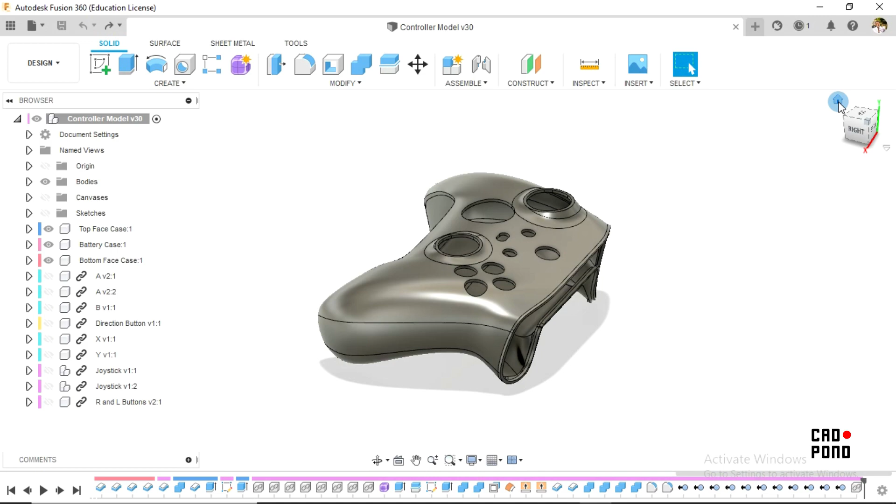In this video, we're going to proceed with our Xbox Series X controller pad, and our assignment is going to be to create our buttons located in these spaces and also the Xbox logo located here. It's going to be really simple, and we're going to be using tools that are quite easy to understand, which are to offset faces, to cut faces, cut bodies, and just that.

Alright, so let's get right into it.

Okay, so the first thing we're going to do is go over to this spot and make all of these bodies or components invisible. Our bodies are visible, so we just go back to this shape. Hopefully you still have this in your feature tree and haven't deleted it yet. However, if you don't have it, it's going to be a different procedure for you. So I suppose that you still have this, and hopefully you do.

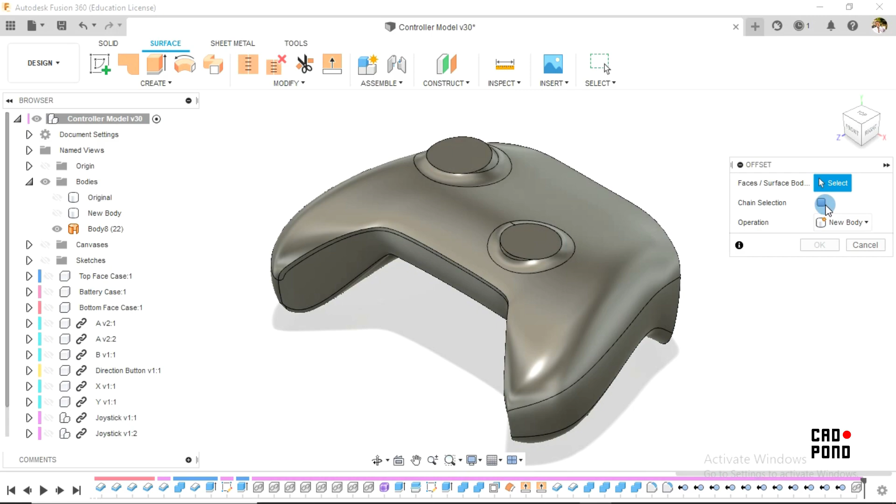To go on, we go over to surface, and we're going to be creating an offset of this surface here. Make sure that chain selection is unselected or deactivated, and then I'll select this top face. In your case, if you don't have this surface anymore and you've deleted it, what you're going to have to do is go to the top face and click on it as your own reference face.

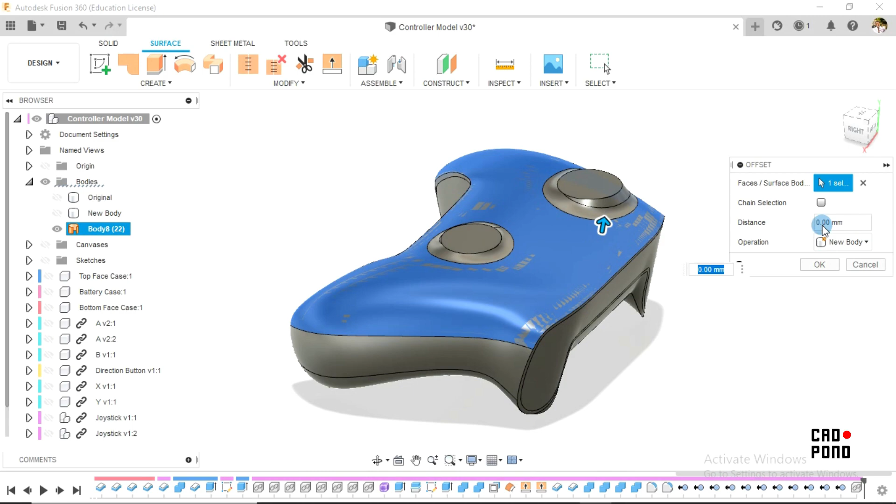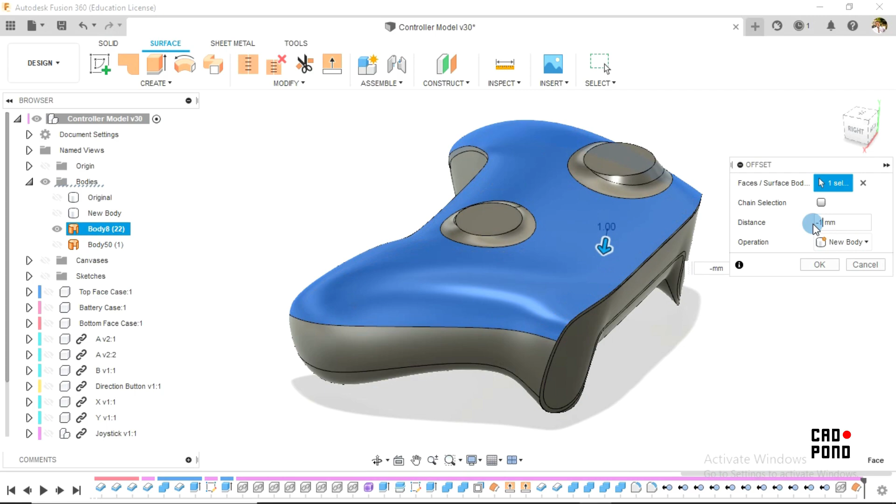But in this case we're doing this, and our first distance is going to be 0.25 millimeters, going in the upward direction, and I say okay. I'll make that invisible for now and repeat the same process. Offset again, I'll select this and make it go in the opposite direction, which is minus 1.5. Alright, so with that we say okay, and I'll make this entire stuff invisible.

So what we have here now is these two surfaces. Like I said, in case you do not have this and you have to use the top face, then you're going to come across a challenge that you have a circle here which needs to be closed up.

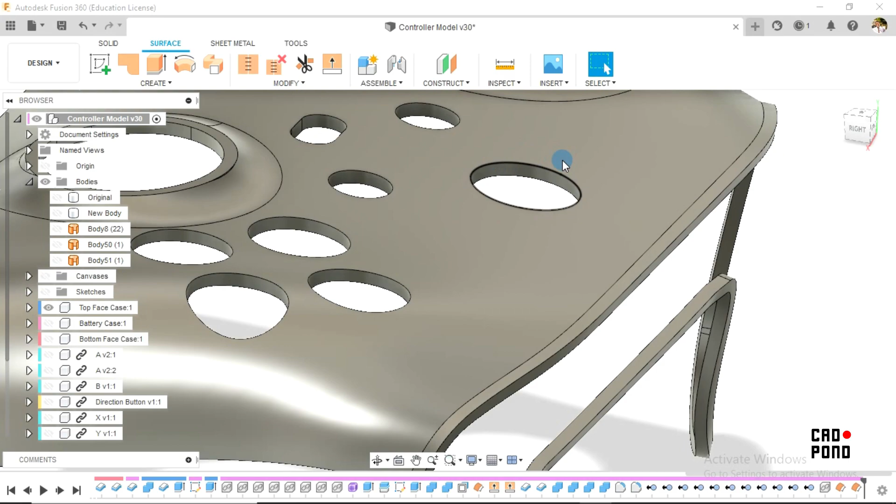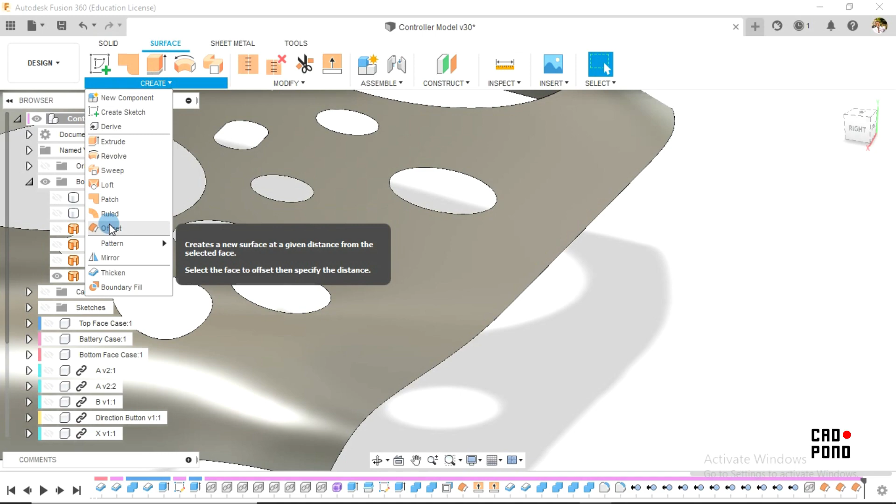In that case, what you're going to have to do, I'll just show it real quick, is to create your offset. Let's assume we're creating the offset at this distance. Alright, and I'll make this invisible. So how you're going to fix that - you do not have to bother with the rest of the openings that we have. You go over to create and patch. So with the patch tool, we just select the boundary edges and say okay. That solves the problem.

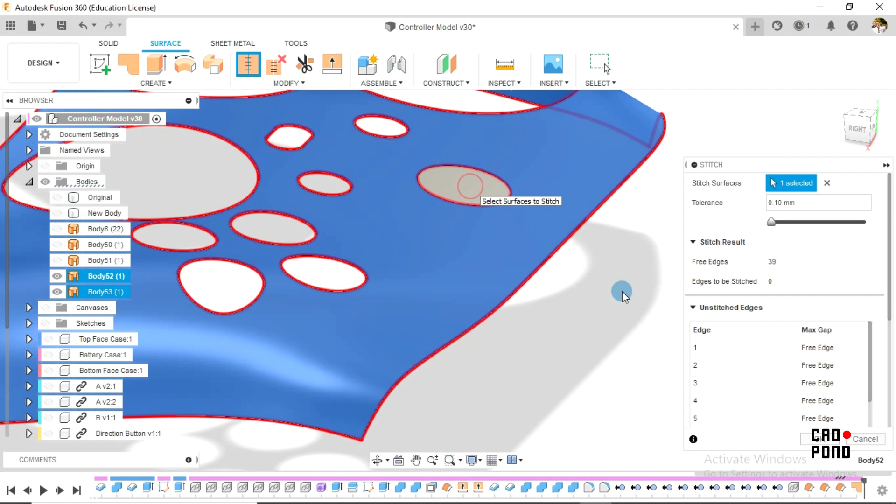However, this is not our process, and when you're done with this, you can also just stitch it together, one and the second face too. Alright, so with that, okay, and then you pretty much have what we need to proceed. You do not need to bother about the rest of the parts. All you need is just this part here. However, we are not going to be using this, so I'm going to get rid of all these.

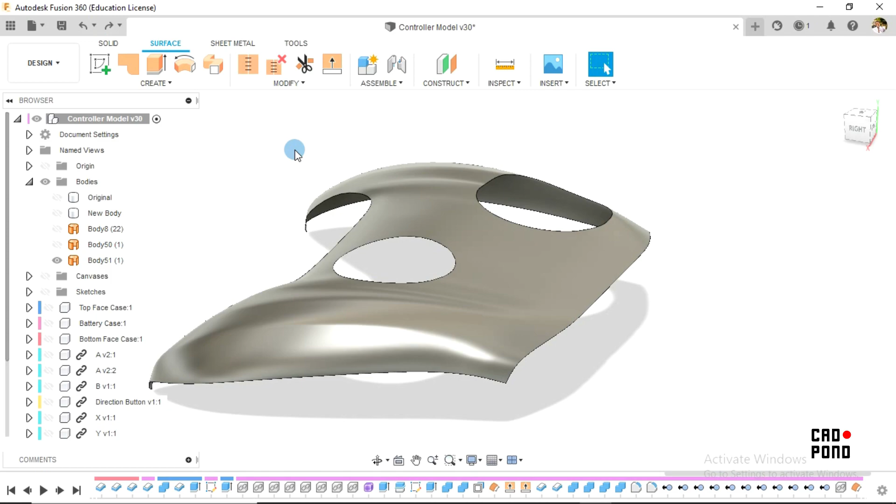Alright, so we have these two here, and then the next thing for us to do, we go over to our sketches, make it visible, and then we look for the top sketch where we created all of these features.

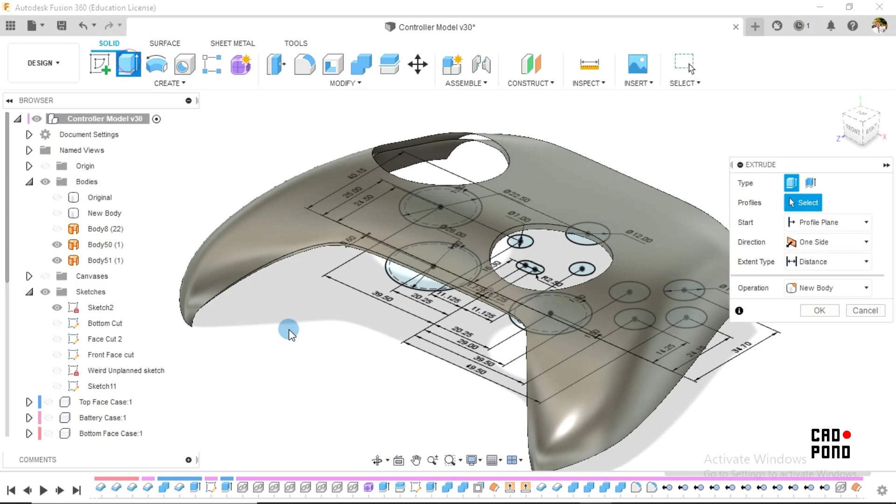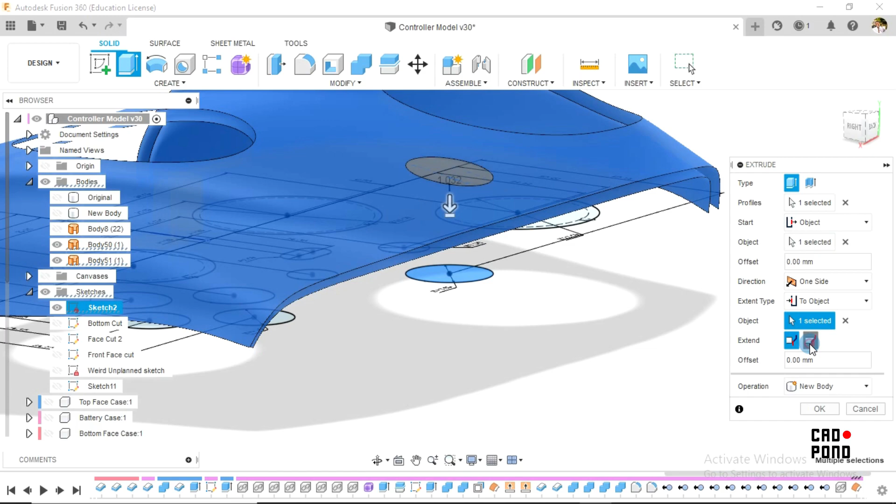Very easy. I go over to solid and click on extrude, and what I'm going to be extruding is this body here. I click on that and choose my start plane to be object, which is this object, and choose my end type to be to object again, which is this object. And I'll choose this and say new body, fine, and okay.

Alright, so we notice that there's an extrusion located in between the both of them, and it uses those two surfaces as the extreme extents, which is what we want to have. So I can make this invisible and we have this.

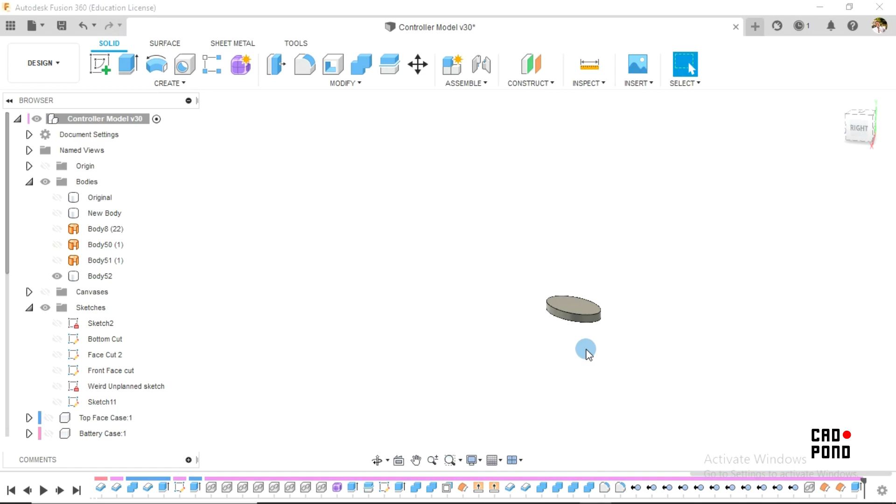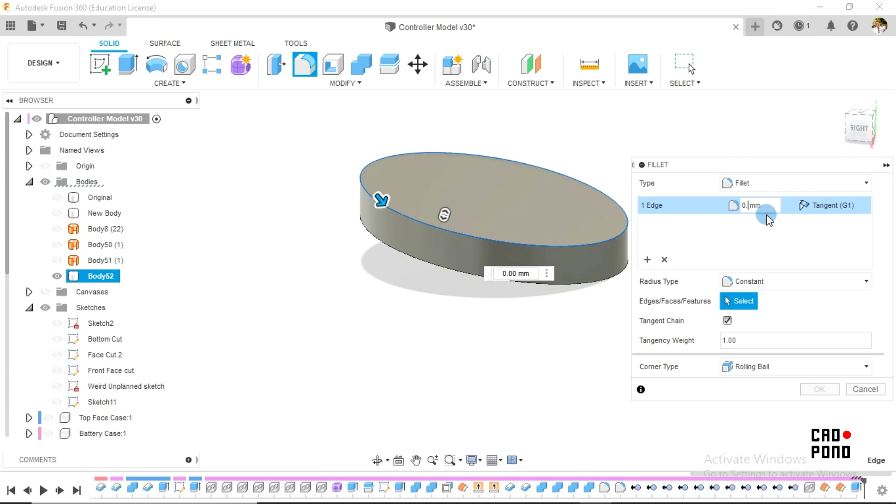Our next procedure is easily going to be to create our fillet. So we understand that this is not supposed to be sharp - it defeats the purpose of ergonomics when it comes to product design. So it has to be something that is quite safe for users to use. Sharp edges like this are not allowed. Hence, we create a fillet, and we don't make it a lot. So I guess we just make it 0.3 millimeters and say okay.

Alright, so if we make the top face visible now, we notice that this is what we have, and it's flushing with the bottom face here. I'll make it invisible again because I really don't need it.

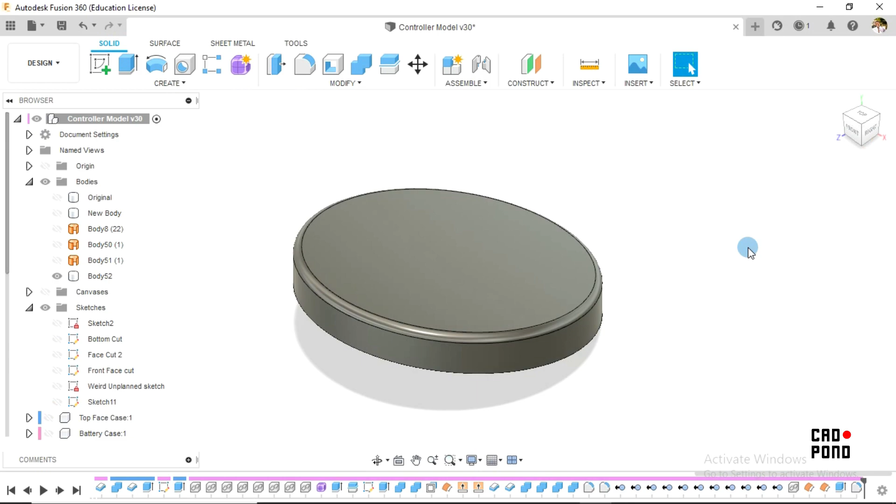Now our next thing to do will be to create a new sketch. So using the sketch, on the top plane, we have it this way. I move and position properly. I go back to canvas, and I make the top canvas visible.

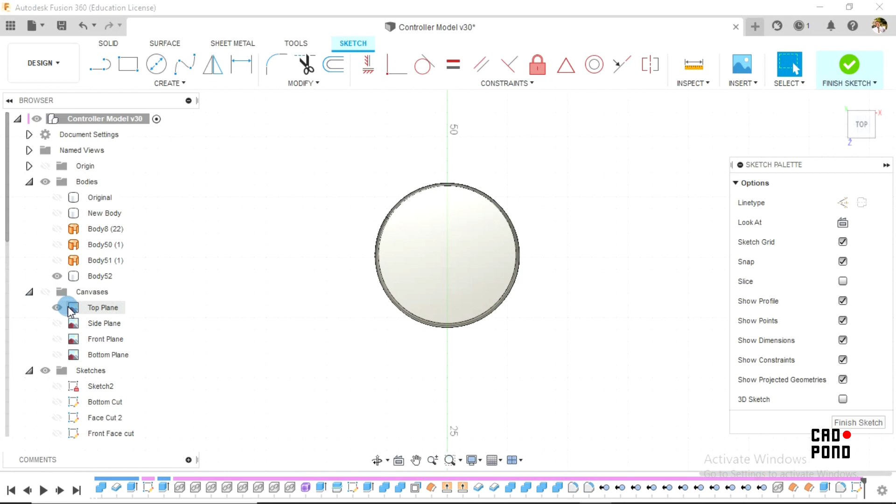So what we're going to do right now is just to trace out the shape of the Xbox logo. And to do that, we're going to make use of our spline tool, the control point spline.

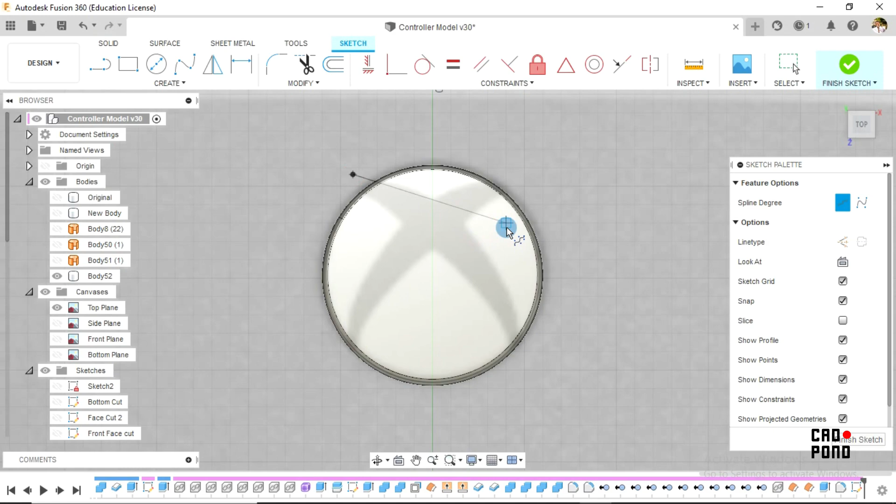I select my first point. Take note that it doesn't have to be accurate. I select my first point and my second, click on the check mark, click on enter, and drag this point here.

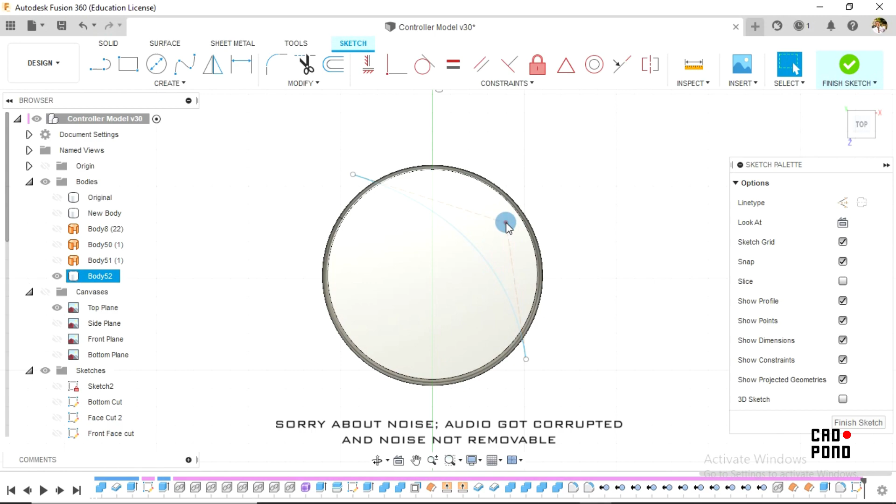I'll make this canvas invisible, and also the body, so it doesn't confuse me. So I click on this and I'm able to drag to position it properly to the shape that I desire. Once you've gotten your desired shape, the next thing is to repeat the same process.

Create spline, control point spline. I select my first point, my second, and my third. I'm using the control point spline because I think it's easier to control, definitely. And I'll say enter again.

In other cases, if you use the other spline, which is the fit point spline, it's kind of difficult. Well, probably not for everybody, I don't know. But for me, I prefer this control point spline.

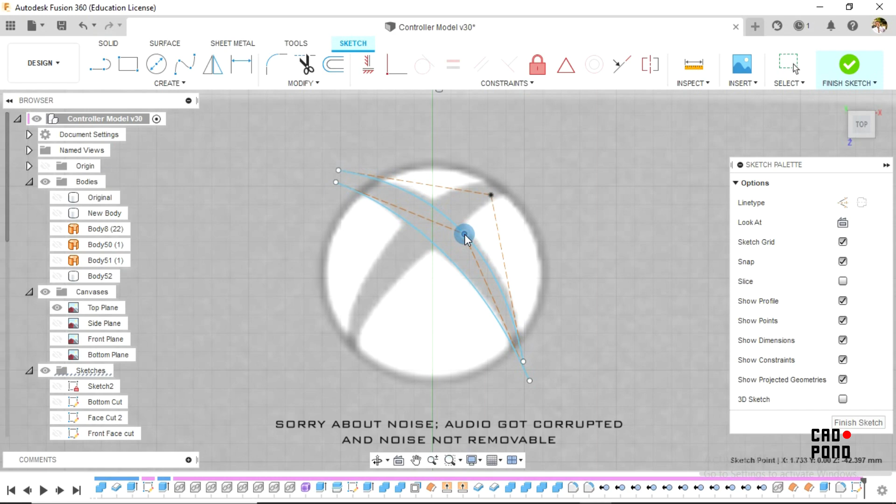Now that we have done this and we're satisfied with the way our logo looks, the first part of the X shape, we're going to easily create a construction line for the purpose of mirroring. I'll draw this way.

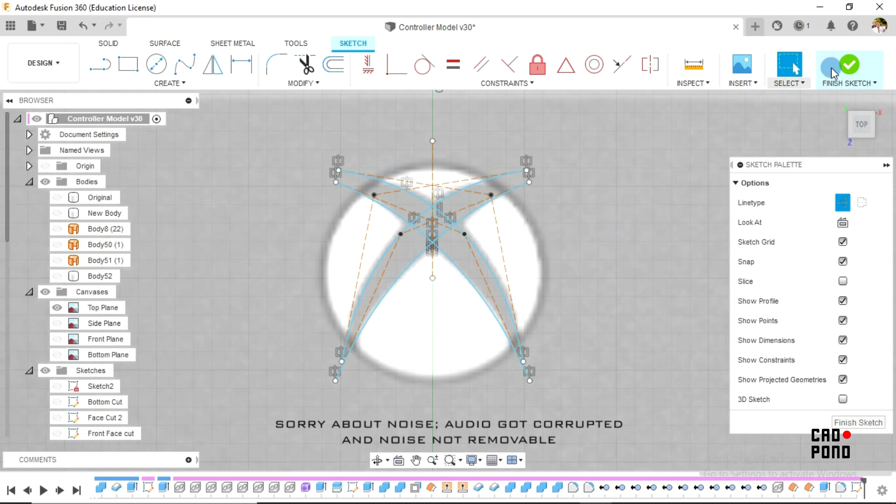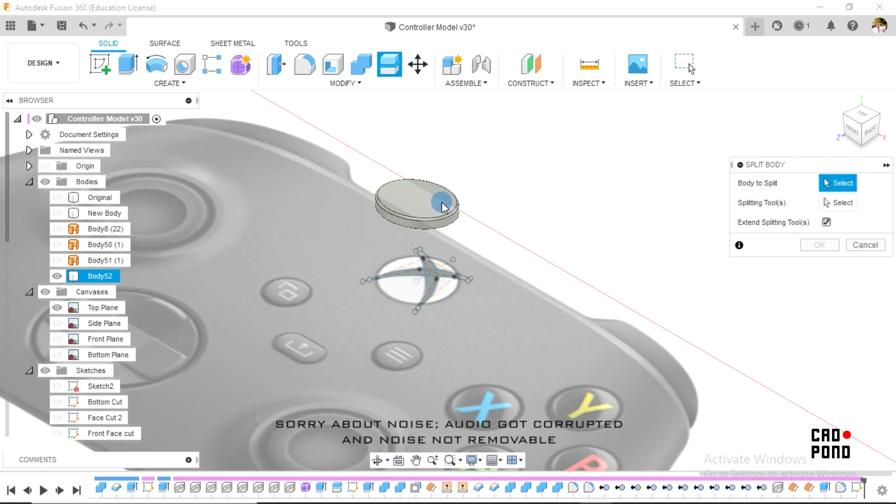Now we're going to go over to modify and choose split body. The body to split is this body, and our splitting tool is going to be the sketches we created. However, for some reason, we cannot select all of the sketches at the same time, so I suppose we can only select sketches that do not cross each other.

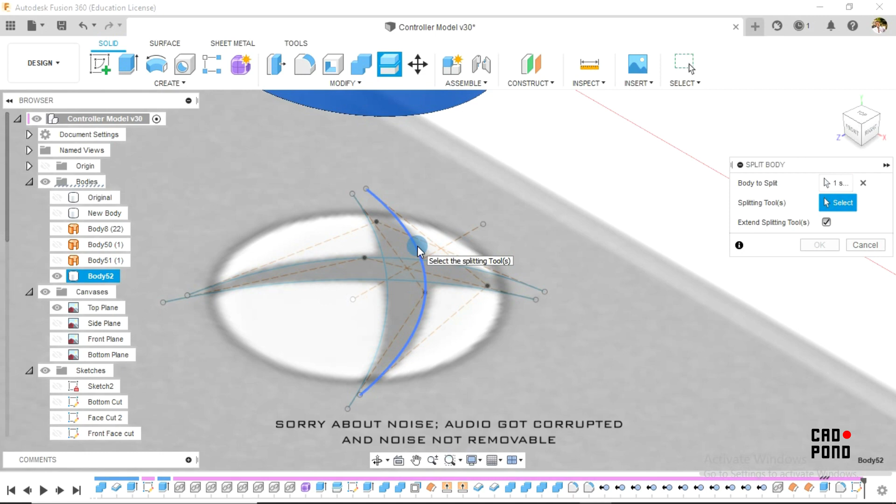I'll select on first splitting tool, select on this and this. We're not able to select this because I guess it crossed these sketches. And we use the extend splitting tool so that it cuts it completely, and we say okay.

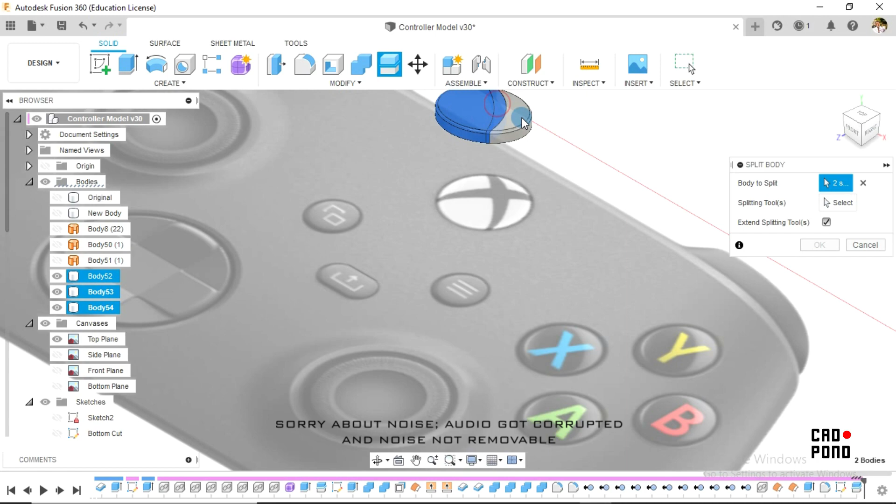Now that we have this, we repeat the same process, modify and split body. Take note that we have 3 bodies now, so we have to select every one of them. And then we make our sketches visible again.

Oh, not you. You. And then we choose these sketches now. Alright. Okay.

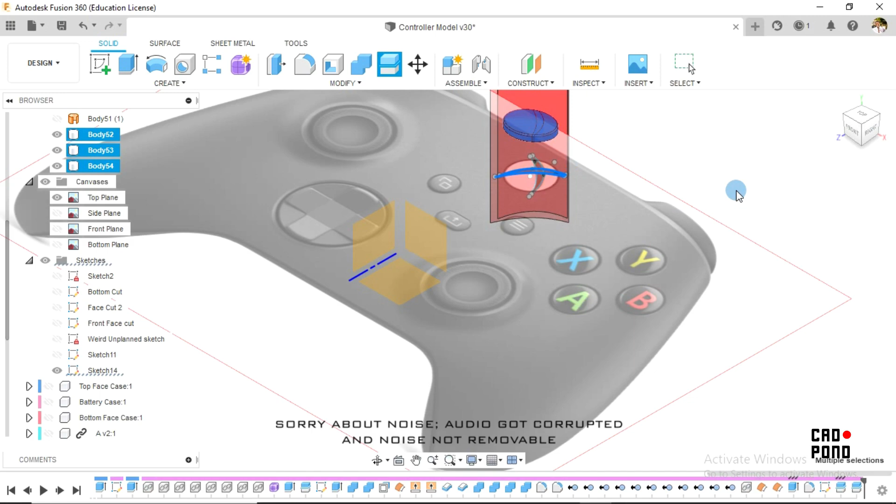Now with this, we have our Xbox logo done, and all we need to do is to combine some of these bodies together. Alright, so we go over to combine.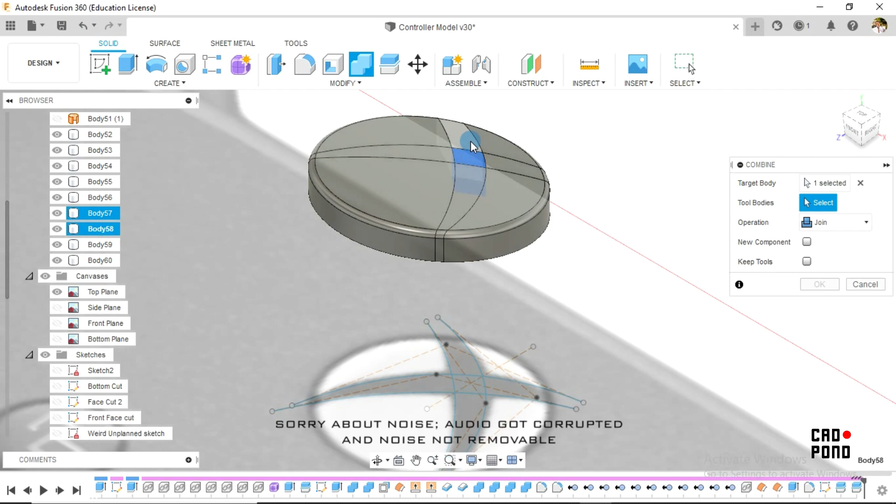Our target body is going to be the center body, and our tool bodies are going to be the other bodies created. So we choose new component and OK.

Alright, so we still have the bodies separated, and it seems, yeah. So we just remove the one at the center. Okay.

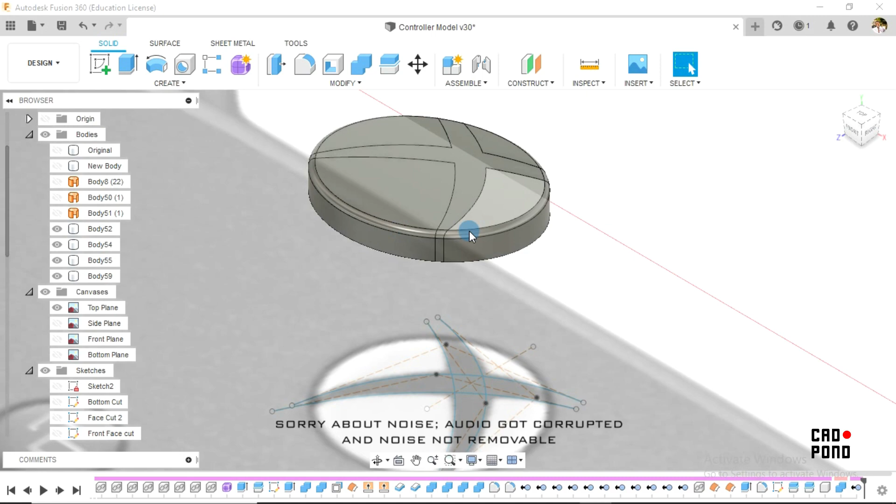Alright, so this is done, and then our next step is going to be to create the other buttons 1, 2, 3.

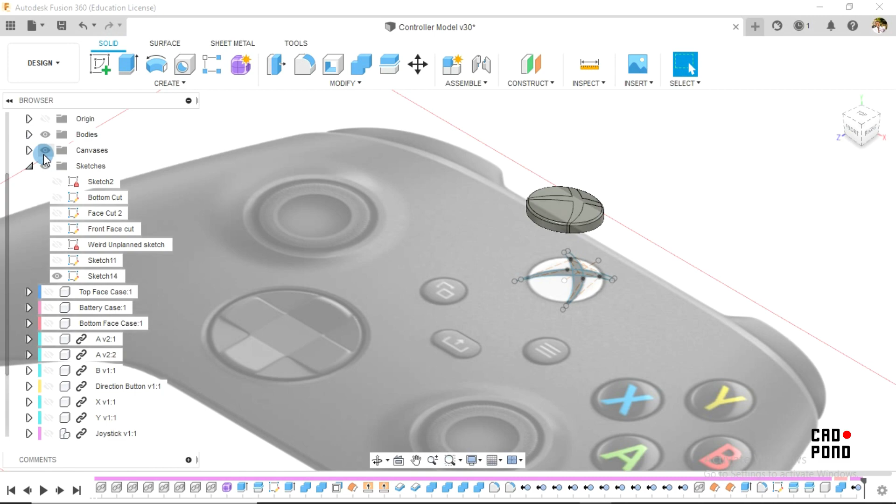Alright, so to do this, I would unselect this and reduce this, make the canvas visible, I guess, then turn up the sketch. So we check up the new sketch here, and we know that we have the dimensions for the bodies here. We're going to edit sketch, and we just create some offset, which are really simple things.

So the first offset we create is going to be for this, and we make it 0.5 millimeters outward direction. Then we create an offset again, coming inwards with minus 0.1 millimeters.

Alright, so that's okay. And then I repeat the same process for the other sketches. And the reason I'm doing this is we know that the button is going to be in a hole that is kind of larger. So the 0.5 offset is used for stability for the hole, and then the minus 0.1 is like a tolerance. So we do it again for the slots.

I hope my explanation makes sense. And we come inwards also at minus 0.1 millimeters. Alright.